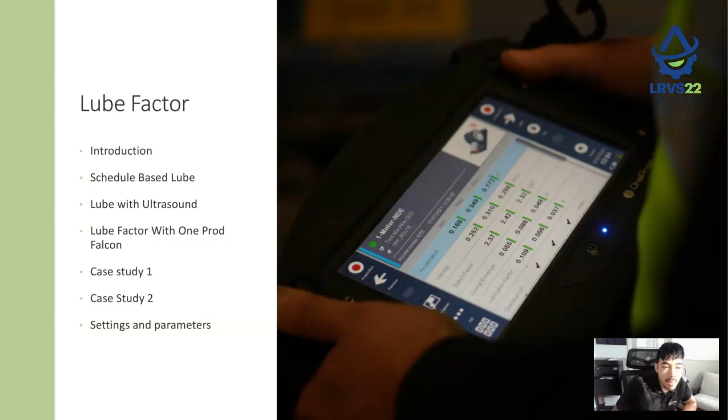Then we'll go through a case study of where this was put into practice. There's two case studies as well. And at the end, we can go through the settings and parameters if we get time. But that's kind of the boring stuff. Let's get into the good stuff, okay?

So introduction. They say that 1/3 of all bearings fail due to poor lubrication, and that is in line with SKF's article, Bearing Damage and Failure Analysis. So this is a proper article; you can see that online. There are so many factors that contribute to good lubrication practices, but being able to lubricate a bearing with the exact amount of grease has always been a challenge. It's always been something very difficult to do within the industry.

This always leads to unaccounted costs or labor due to premature bearing failure, which, if it were detected, wouldn't have happened. And if we look at how many times a bearing is starved of lubrication, even within regreasing intervals on a schedule base, if we were able to keep that bearing sufficiently lubricated all the time, that bearing could potentially live 10 times longer. That is quite phenomenal when you consider how many bearings we have out on plant, how many require lubrication, and what practices we apply to them within that maintenance standard.

So lubrication is often overlooked. We find this a lot. I go to a lot of factories, and when we look at how much money is invested in that one practice, I tend to find it is very underfunded, whether that be stores, how the lubrication is kept in terms of oil stores, the lubrication guns or equipment they use to lubricate, or how much money they've spent actually creating the schedules and putting data or knowledge into them.

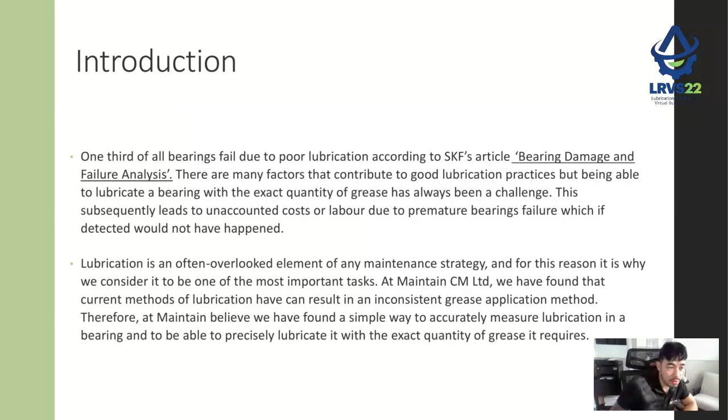So that leads us to the next part. Let's have a look at schedule-based lubrication. What we'd consider a traditional approach to lube is lubrication based on a time-based schedule.

So this is a regular basis. So whether the bearing requires it or not, it is lubricated on a time base. So say, for example, you've got one motor on your plant. It's a very critical piece of equipment. And the schedule says that that motor will get lubricated once a month. And say, for example, it's 5 grams of grease it requires. There's no looking at whether the application requires it or not. It is just done on a consistent basis and it is lubricated.

Okay, it's very easy to be able to put that into action, but in between lubrication intervals, how do we know whether it has enough or hasn't? Or how do we even know that it's even enough in there anyway? It's very, very difficult to understand that that bearing has the correct amount of grease in when it's done on period, when we do not understand the metrics of that machine. So measuring in terms of monitoring is extremely important anyway.

Again, this comes down to looking at strategies of what you've got with your critical assets in terms of how is this actual machine being monitored in the sense of vibration. And vibration, again, if you're looking at high frequency vibration, it's still vibration. You're still looking at lube film and understanding high frequency elements as well. And as soon as those parameters start to get out of sync with what is normal, then it creates an alarm for us to understand that action is needed to lubricate that bearing.

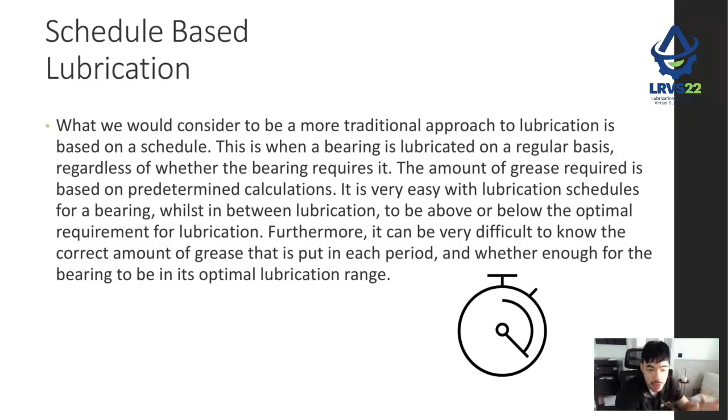Okay. So lubrication with ultrasound. So again, ultrasound typically has always been, shall we say, the number one main technique to use when doing condition-based lubrication, purely on the sense that it can monitor a lot higher than what vibration analysis can. So typically when you're measuring around about 20 kilohertz or above, this is interpreted as an ultrasound reading. And again, ultrasound is a friction-based event. So when we're looking at friction-based events, we're looking at extremely high frequencies. Again, this is why ultrasound has always been a very good technique, right?

So an individual experienced in lubrication, and we know the bearings and the machines well, we can understand how much grease we can put into that. And therefore, a level of experience is required when you're using ultrasound as well. Because the thing with ultrasound, especially most basic ultrasound devices, is it will give you a decibel readout, and it will just give you a readout, okay? Again, in terms of frequency range, you're not measuring a band, you're measuring up to a certain frequency range.

So with the UP 10,000, for example, piece of UE equipment, they say that 30 kilohertz is the contact probe Fmax that you want to be listening to for contact bearings or poorly lubricated bearings. But the thing is with that, we're measuring nought all the way to 30K. So we're taking into consideration every other sound within that, and that will give you an overall decibel level from that area. Ideally, what we want to try to do is band that area. It would be a lot more effective to do so. So if you can band the area, then you just want to be looking at purely the place where poor lubrication happens, and you don't want to be listening to the whole frequency range.

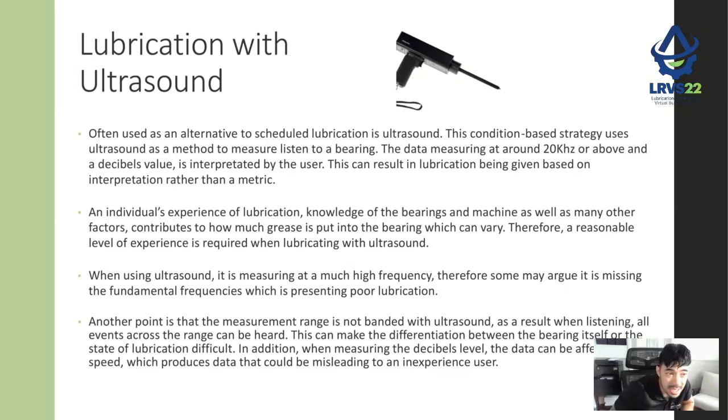Okay, so moving on to the Falcon, we're going to now understand how this lubrication factor reading works. It's a very good analyzer, and the beautiful thing about this particular analyzer is it can measure up to the 20 kilohertz range.

Okay, in 10 seconds of time, it can take a very quick reading, and it kind of post-processes a lot of the readings from a single time waveform. And right on the edge of that ultrasonic range, we've found by using that VA, it's really possible to detect poor lube as well.

And we've done a lot of studies, and this is when I first got this collector 2 years ago. We were really interested in understanding that because it can measure up to them high frequency ranges, where would we expect to see the natural friction related events as actual raw data? So what would be the frequency response of that poor lubrication when measuring up to them high frequency ranges?

And the beautiful thing about vibration and spectral analysis is that we can actually view that spectrum in live mode, and we can actually start to see how machines react in terms of frequency ranges. So where there is a fault condition, we can have a look at where we'd expect to find that frequency response. And what we did is a lot of tests with the wireless sensor that we were given, and we found extremely great results.

So when we're testing within the high frequency spectrum, we actually identify between 7,500 hertz and 12,500 hertz. If you're in cycles per minute, you're looking roughly between 450,000 cycles per minute to 750,000 cycles per minute. This is where the poor lubrication kind of presents itself within the data as like a haystack or a raised floor.

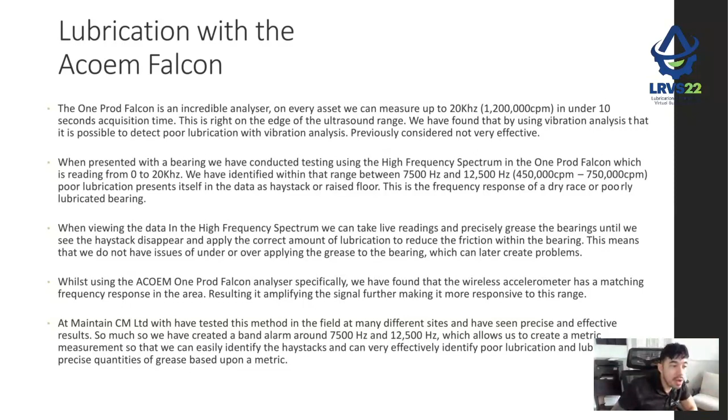Okay, so here's the case studies. Let's get into the case studies to show you guys this in action, right? So this was for one of the biogas sites that we look at. We look after 8 biogas sites across the UK, extremely critical sites, and gas booster pumps are extremely critical. If one of these actually fails, then the site struggles to maintain pressure for the gas, and it potentially can cause downtime.

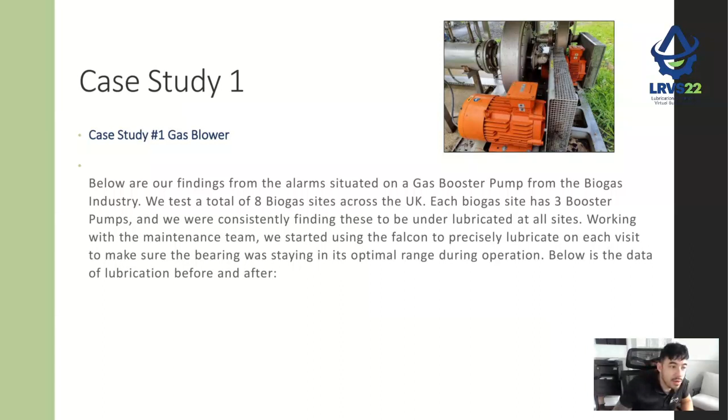And again, we all know gas prices are through the roof at the minute, and these biogas sites are even more important than ever right now due to the economy and everything like that. So this was actually a gas booster blower, and it was one of 3. And working with the maintenance team, we started using the Falcon precisely to lubricate at each visit to make sure the bearing was staying in the optimal range. So if we have a look at the data on the next page, here is the information spectrally. And this is our alarm window.

And if you have a look here, what we're doing with the Falcon, we're taking triaxial readings. So don't get too confused by these alarm windows. If you have a look here, this is the motor non-drive end, and what we can measure is axial direction, the horizontal and the vertical, and they're the 3 readings that we take on the motor non-drive end.

Then the drive end of the motor, as you can see, we've got axial, we've got horizontal, we've got vertical, and on the pump here, again, vice versa. So we've got 3 axes for both. And that's what we found on the blower pump bearing number 1.

As you can see, lubrication factor here, we had a red alarm. So again, if you look at the metrics here, a well lubricated bearing is very low. You're looking at 0.02. A poorly lubricated bearing triggers the amber alarm at 0.2, and 0.4 is critical. Okay, so as you can see here, we're talking very low measures. So guys, this is why it's very important to band alarm certain elements, because again, 0.4 doesn't seem very high.

But if we have a look within this frequency range, remember, higher frequency ranges, you're not going to get a higher overall value, especially when it comes to friction related events, because you've got a lot of other vibration events happening within that spectrum. It's not necessarily going to even trigger your overall acceleration alarm, because if you look at 0 to 1,200,000 cycles per minute, the whole frequency range, all of this needs to add up to exceed the alarm for acceleration, and it might not actually peak above that threshold.

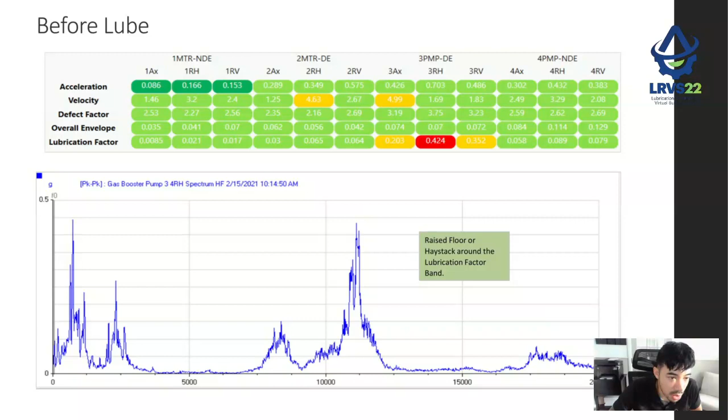Okay, so after lubrication, this was what happened. As you can see, lubrication factor reduced significantly straight away. And that massive haystack, if we go back again, you'll notice that even these haystacks associated to that poor frequency response in terms of friction are completely reduced. And that was after 3 or 4 shots of grease, straight away. And just to give you an example, acceleration of course is going to fall as well, because you're looking at the whole frequency range. But as you can see, it's only fallen by 0.4.

So it's not fallen by a massive amount. So this is why it's so important as well to have a band around the frequency ranges that you need to see. Because when you're measuring at such a high frequency range, you want to be able to look at certain things within that spectrum. Because one high frequency spectrum is just going to give you a lot of information. It's going to be very difficult to pinpoint exactly what you do want to actually see. That makes sense. Okay. So moving on.

If you have a look, this spectrum is a very beautiful spectrum because this allows us to have a look at before and after. So as you can see, the blue is the lubrication before, right? Now, you can even see a kind of high tail off here as well, which has happened a bit. The main kind of peak is here. And as you can see, the red is after lubrication, right? And the frequency characteristics change quite a lot, which is really interesting here.

Even at the lower frequencies, you can see a little bit of a shift of the frequencies moving up a little bit, which is quite interesting. As you can see, this haystack is completely reduced. This one here, again, is completely gone. And this one here, which was the main kind of frequency response, is completely reduced. So it is really influential in the sense that we have understood exactly our actions of lubricating that bearing has created a better film for the bearing instantly.

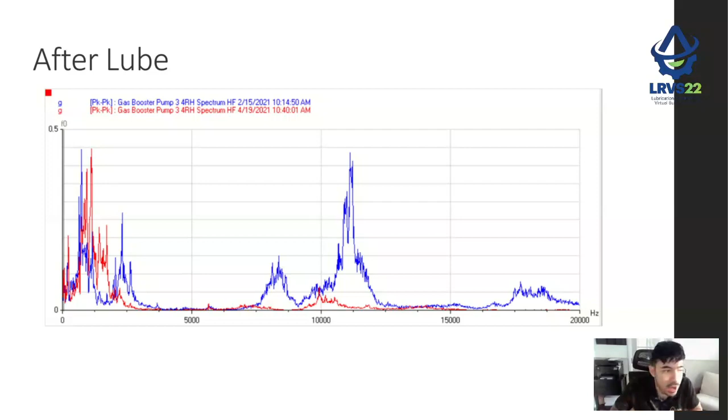And we can now, obviously, with our collector, as you can see, it's gone from red to green instantly. So this is the beautiful thing about the metrics and alarm levels of what we're doing here. It lets the user know that there's enough grease in it without any subjective experience of using ultrasound or listening, if that makes sense.

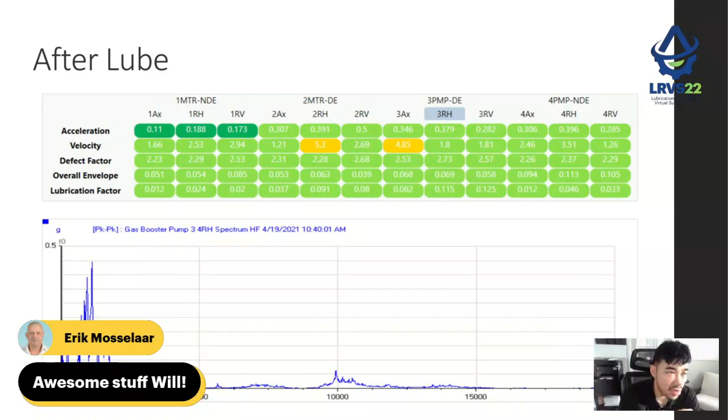And that is so important, because especially when it comes to entry level people that don't understand vibration analysis so much, what we can do is create this lubrication factor alarm, and we can say, look guys, if it goes into yellow or red, lubricate the bearing. If it reduces, then whatever you've done in terms of action has actually cured it. And that is paramount within this industry, 100%.

So case number 2, this is getting on to bigger beasts as well. We want to show you an application with an actual motor as well. This lube factor is extremely effective with plummer block bearings. It is still very effective with motors as well. Probably better with larger motors, because, again, the smaller the motor, the harder the frequency response will be at those higher ranges.

Okay. And if we have a look, this was actually one of our customers in the food industry. So we provide asset care with 3 of these motors. They've got 3 large compressors, ammonia compressors, that are extremely important to their processes. And we use lubrication factor, we closely trend the lubrication values, and as we start to see early signs of lube factor, we start to lubricate as well.

This motor previously was in alarm for lubrication 80% of the time during our visits. So every time we came here, we found that the schedule the guys were doing was completely out. And they even had 2 bearing changes. This customer's been mine for the whole 6 years of the business. And we've actually changed the bearings ourselves once on this, down to poor practices of them not lubricating correctly. And since we've taken over, we have seen the life cycle of this asset extend phenomenally.

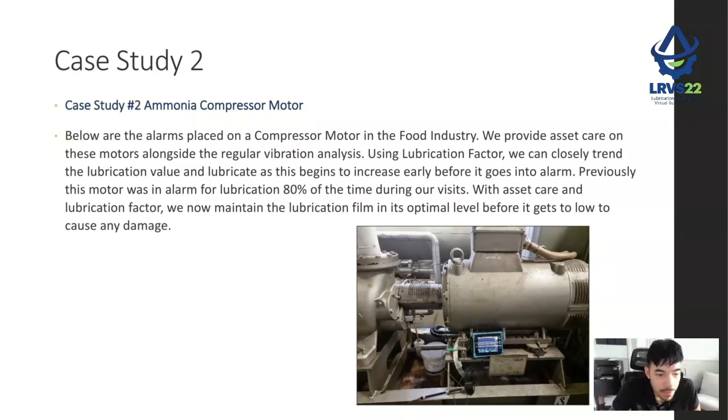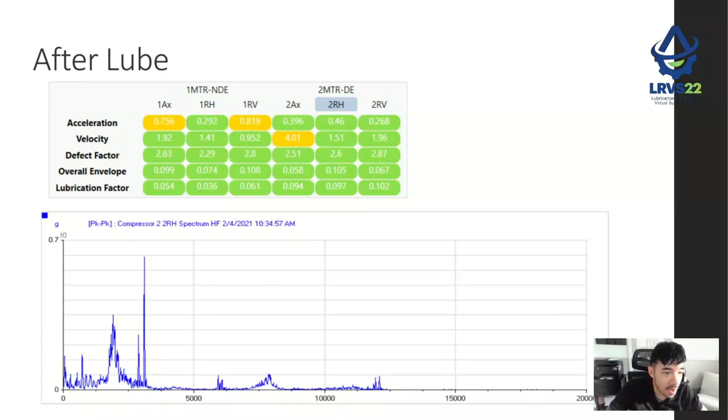So again, if you have a look at lube factor and the motor non-drive end as well, as you can see, 0.05, 0.09, very low, going from 0.3, 0.3, 0.6, 0.42, extremely high readings to very low readings. And if we have a look again, here is the difference in terms of readings. You can see again that the inverter frequencies, and it's very odd that the inverter frequency has actually fallen as well, which I don't know the answer to, but very interesting one.

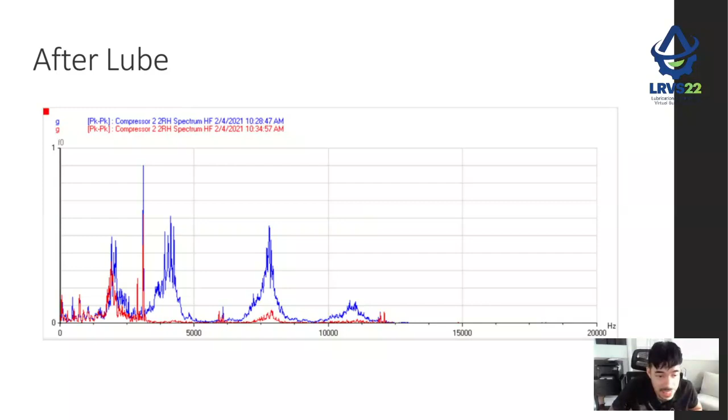But as you can see, these large haystacks that were appearing, as you start to get worse lubrication, will start to move lower down the spectrum. So this is why it's quite important to capture these events earlier, because it can cause havoc. And the thing is, when your acceleration is in alarm, it may make you think that there's other issues and problems going on. But the fact is, all that's happening is that there's high friction within that bearing causing high acceleration.